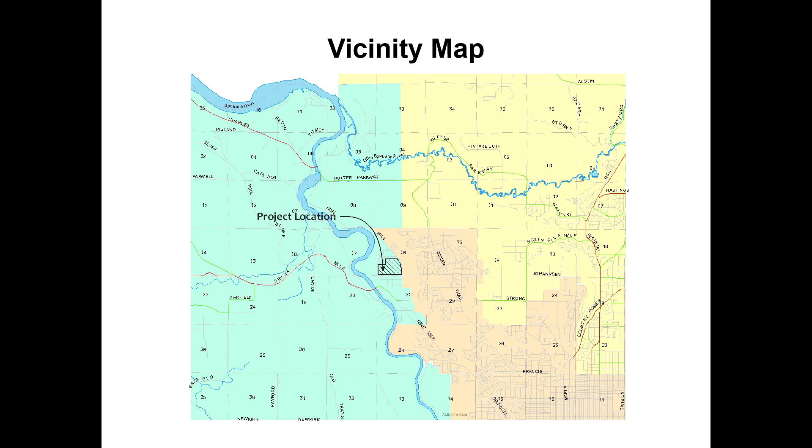On the north side, it is bounded by platted single-family lots that have been in place for many years. The south likewise is fully bounded by single-family homes. On the other side of the highway, the land is vacant. It's all owned by one family and has never had development on it. To the west, the property falls steeply away and is owned by the state.

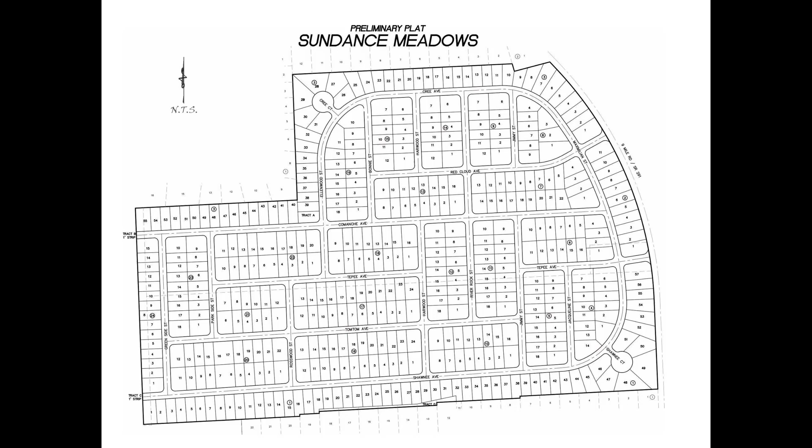At the present time, this is the layout of the preliminary plat. Now, some of you may have seen a previous plat layout that showed things such as townhouses, row houses, small lots, that kind of thing. That is no longer under consideration, and what is planned here is single-family homes available to all age groups.

There are two access points shown on the right side of the screen that are planned to Highway 291 or 9 Mile Road. The south one is called Tepee Avenue, and the north one is called Red Cloud Avenue. Those names are continuation of streets up on Indian Trail Road and were chosen in the customary manner of Spokane County. On the left side of your screen, you'll see two stub roads that go to the state property. At the present time, they don't tie into anything, but they do provide future access if any is needed.

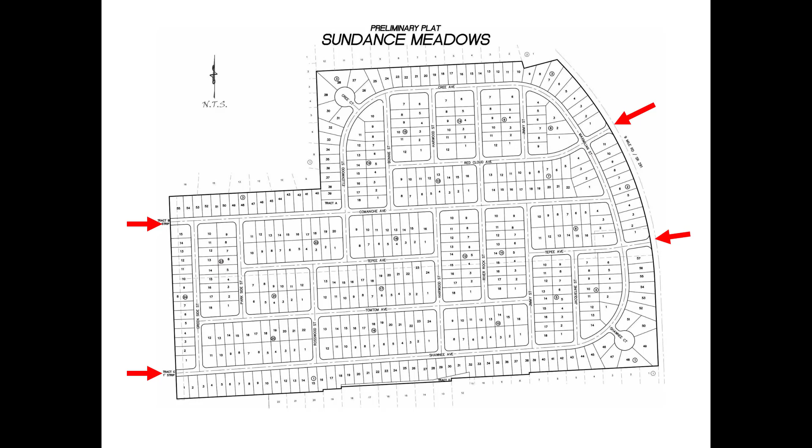On the south side of the plat, there is a small access road into the site that has been used previously for golf cart access to the golf course. At this time, it's not planned to extend that onto the site, and if it was extended, it would be used for pedestrian and bike access only. It's not wide enough for vehicular access.

I'm going to go through the schedule for a minute just so we have an idea of where we are in the project. This project did begin some time ago. In the summer of 2017, I prepared and submitted a trip generation and distribution letter. That document is fairly short, but it does describe how much traffic will be generated by the site and in general ways where the traffic will go.

In order to determine the distribution, or which direction the traffic is going to go, I actually counted which way the traffic went at Kindick and Highway 291. And I was surprised. It was 18% going to and from the north and 82% going to and from the south. That was consistent both AM and PM, both entering and exiting, and that's what was used in this study.

The next thing that happened was in the spring of 2018, when the amount of traffic that will be generated by this and the distribution of that traffic was brought forward to Spokane County as the approving agency of the preliminary plat, the City of Spokane, because they are a nearby agency and will receive a great deal of the traffic generated by this plat, and the DOT, who is providing direct infrastructure and from whom we need to get access permission. I'll go over the scope that we came up with them in just a minute here, after we go through the schedule.

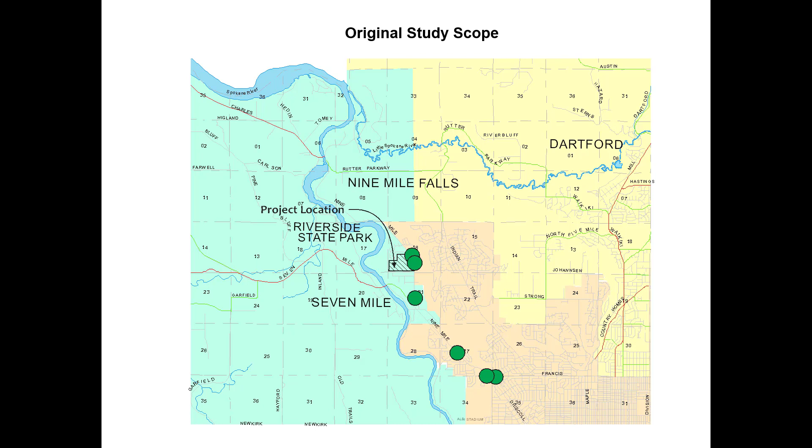The purpose of this meeting is twofold. The first is to share how the information received at the scoping meeting was used in the report and through the processing of the TIA. And secondly, to share the results of the traffic impact analysis that was conducted for this project.

Note that if you have public input, the hearing examiner will be happy to take that. That hearing will be at Spokane County, and the noticing will be very similar to what you received for this meeting. There will be a sign on the site with the date and time and place. There will be an ad in the newspaper with the same information, and if you live within 400 feet of the site, you will get a notice in the mail about that hearing.

Let's talk first about the input that was received at the scoping meeting and how that was handled. So one of the first things that people asked was, can we include the intersection of Highway 291 and Charles Road? And the answer to that was emphatically yes. We will absolutely include that. That is a location where the grade school traffic from this site, all the grade schoolers will use that intersection, as well as the other school-age children who are continuing through. It's also one of the first intersections that you come to north of the site, and as I mentioned before, 18% of the traffic will go that way.

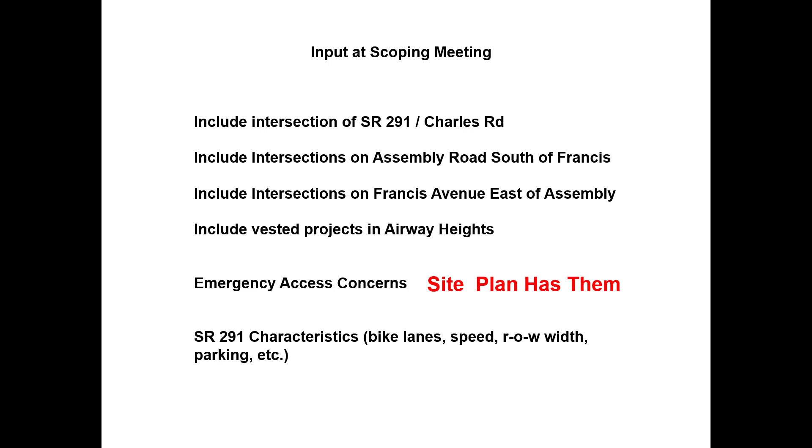They also wanted to talk about the Highway 291 various characteristics, bike lanes or lack thereof, the speed of the road, the right-of-way width, the parking, etc. And that's included later in the report.

There was even more input, including school bus issues. So will the school bus come and pick up children from here? The answer is yes. The school district will serve the site. There was also some concern about overcrowding at the schools and those kinds of things. And the school district will be notified about the hearing and has the ability to write proposed conditions to the hearing examiner for consideration.

They also wanted to know if STA, the Spokane Transit Authority, would extend a bus route here. Every time STA is approached about this, they make it very clear that they make their own decisions about routes, but the more population that there is in an area, the more likely it is that a bus route will get extended.

The next thing people were worried about was, is the sight distance acceptable at Kendick and at the two site entrances? So let's go into that in a little bit of detail. First of all, let's look at what our criteria is. It's a state highway. This is a table out of the state design manual, and as you see on the left, the design speed of the road, which it's posted at 50 miles an hour, but let's look at 55 just to make sure that we are accounting for the speed of the traffic. It says that the design stopping sight distance is 495 feet.

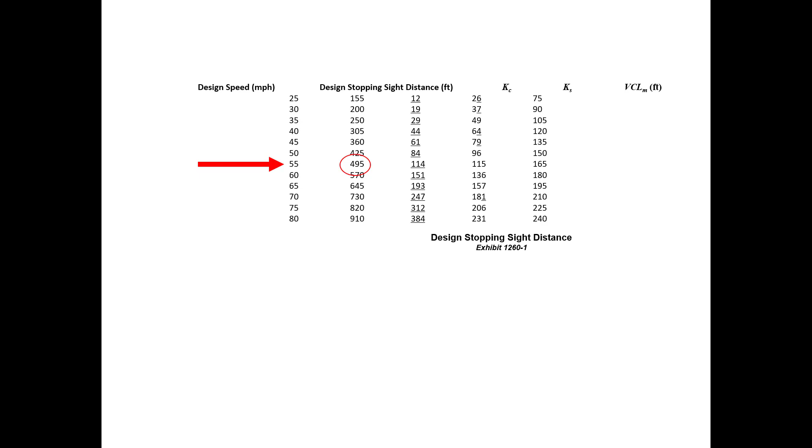The next thing people wanted to know is Barnes Road planned to extend from Indian Trail down to 9 Mile? That was a plan previously, but at this time the city has removed that plan and is not planning to do that. At the time it would have come into 7 Mile Road, and there's no saying that it might not get added to the plan in the future.

The next thing was about the 4-lane/5-lane highway. Would it be extended to the north? And the answer is no. It is not needed to extend north of 7 Mile Road.

Having completed our discussion on the input received at the traffic scoping meeting, we're going to go on to the second reason to have this meeting, and that's to discuss the findings of the traffic impact analysis conducted for Sundance Meadows. Let's talk about why we would do a traffic impact analysis. It's possible that intersections near this project would fall into unacceptable, what are called levels of service, as a result of the traffic that's generated by this project.

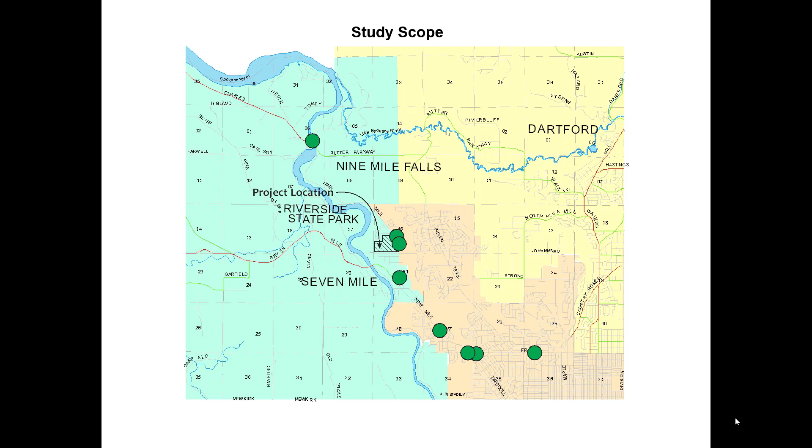In addition to the intersections mentioned previously, as a result of the scoping meeting, there were 2 more intersections added to the study. The first was at Charles and Highway 291. The other was at Francis and Alberta. In order to determine the impact to the transportation system that the additional traffic from Sundance Meadows will have, we have to sort that out from other factors that affect the transportation system.

So the first thing that we need to do is look at the existing system and see how it is functioning. I think those of you who ever drive up this way, especially in the afternoon, you know that if you're northbound on Assembly approaching Francis, that there's going to be a long line of cars and you're going to have to wait a long time. This waiting is called delay in traffic parlance, and if it gets to be too long, people will get impatient and there can start to be traffic crashes. And that's one of the things that we're trying to avoid by going through this analysis.

So the second thing is to look at what the future conditions are going to look like with various vested projects that already have rights to the capacity on the road from all known sources other than Sundance Meadows. And then thirdly and lastly, to look at what the future conditions are going to be with the additional traffic generated by Sundance Meadows.

In order to do this, we first of all collect the traffic volumes during the AM and PM peak hour. During the AM peak hour, we count traffic from 7 a.m. to 9 a.m. And the idea with choosing that time frame is that we're going to capture people who are on their way to work. Conversely, in the afternoon, we collect traffic volumes from 4 p.m. to 6 p.m. with the idea that we're going to capture traffic coming home from work.

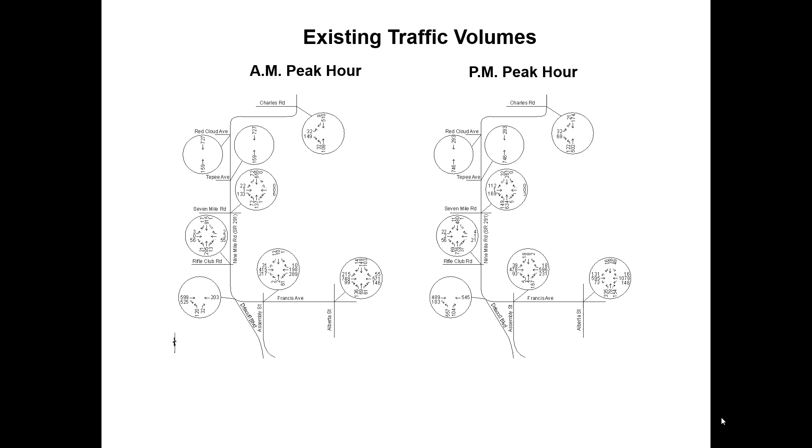So let's look at the traffic volumes that were collected in the field, which are shown here. Please feel free to pause this and look at them in more detail if you're interested. If you want to, they're also in the report, as previously mentioned. Feel free to look at them there.

So here is a summary of the level of service at the various intersections. The letter designation on the left is for the morning commute. On the right is the afternoon commute. We'll notice that Charles and 291 is level of service C and B, indicating that there is no problem with level of service there. We see at 7 Mile and 9 Mile that we're at level of service D in the morning and E in the afternoon, which means that we're approaching unacceptable levels, but at the current time it does meet standards. Rifle Club Road and 9 Mile Road is at level of service C during both the AM and PM peak hour.

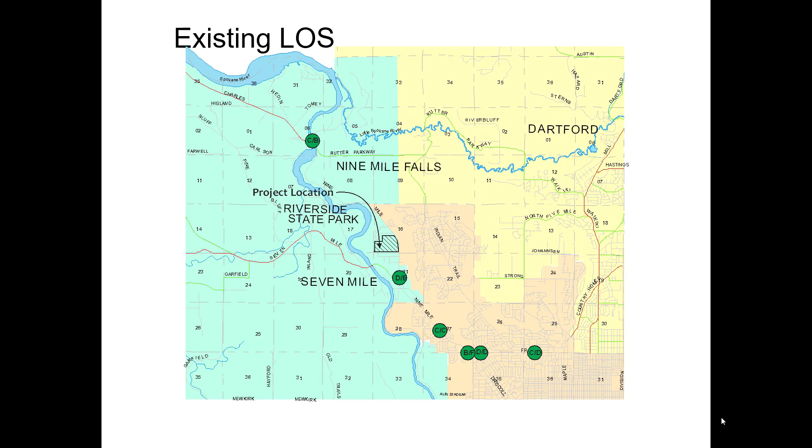As mentioned previously, at the northern end of Assembly, where Francis meets 9 Mile, the level of service is B in the morning and F, quite far into level of service F, during the afternoon peak hour. The intersection of Assembly and Francis, at the northern end of Driscoll Boulevard, is at level of service D, both AM and PM peak hours. Alberta and Francis, as the only signalized intersection, was shown to be functioning at level of service C in the morning and D in the afternoon. So again, our signalized intersection level of service C and D were okay. There's no mitigation required at this time at that intersection.

The unsignalized intersections, the level of service varies from B to F, and the intersection that's at F that requires mitigation is 9 Mile and Francis. It turns out that the transportation impact fee that the city of Spokane assesses to all projects in the northwest part of Spokane, they apply it to all different areas of Spokane, but the one that's for the northwest part of Spokane has as one of their projects a project listed to change the control of that intersection to a roundabout.

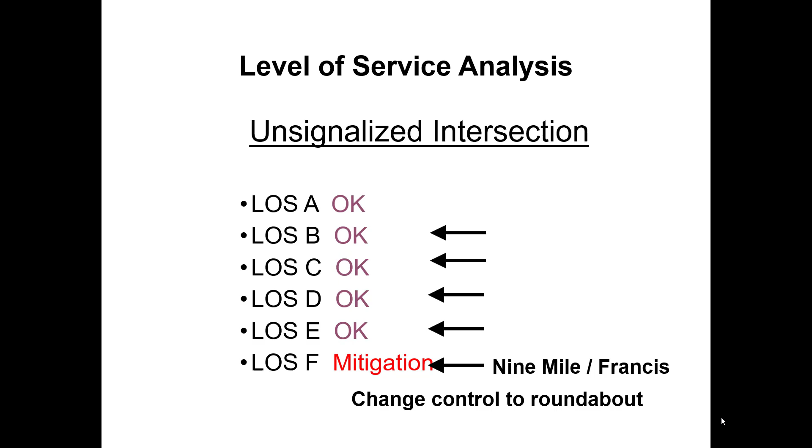This is the concept. This is one of two concepts that are currently being proposed by the city of Spokane. It's the one that I assumed, I have to make some assumptions for future issues, that I assumed would be chosen. Because it does, and notice that it incorporates both Assembly and Francis, and 9 Mile Road and Francis, bringing those intersections into one location.

When this becomes a roundabout, using the traffic volumes that we saw in the field today, the level of service would be A and B, well within acceptable levels, and a vast improvement over what we see today.

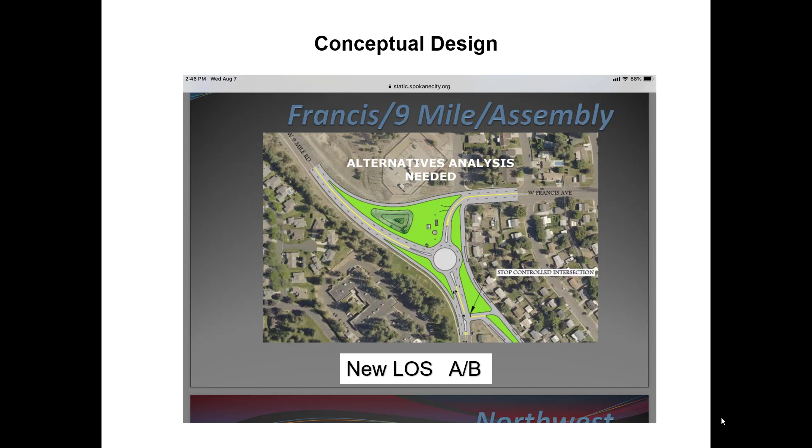So the next thing we need to look at is the future conditions without the traffic from Sundance Meadows. Again, what we're trying to do is sort out problems that exist without Sundance Meadows from problems that are made worse or that arise due to adding the traffic from Sundance Meadows.

One of the things that happened after the initial submittal of the traffic impact analysis and the revised analysis was that we needed to include projects on Indian Trail. And a lot of this was driven by the addition of Francis and Alberta. There are many projects, as you see here, that are located on Indian Trail, and they add hundreds of vehicles to the intersection of Francis and Alberta during the PM peak hour and the AM peak hour.

Of somewhat lesser concern are the Stevens County projects. They're just kind of lost in the shuffle there. That doesn't mean that they aren't important. And these directly will add traffic to all of 9 Mile Road, Suncrest Vistas, and Blackstone. In order to find out what projects still had lots outstanding in Stevens County, I called the county planning department, and there's about 64 lots that are outstanding. There's nothing else that's approved out that way. So we seem to be on the tail end of development out in the Suncrest area.

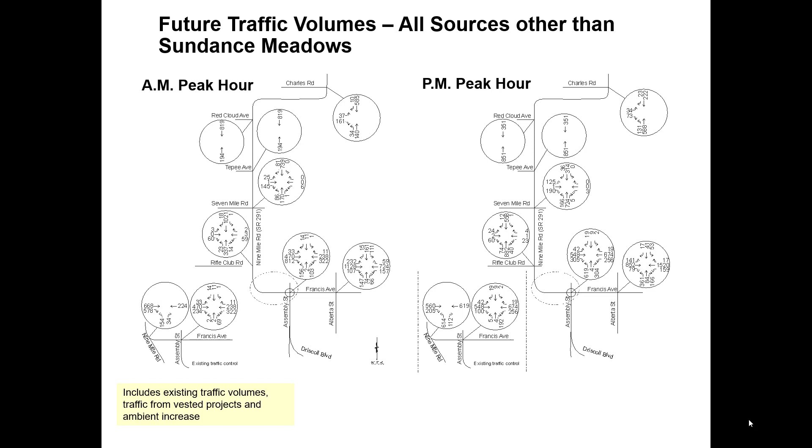This graphic shows the addition of the traffic expected from the various vested projects shown on the previous slide, added to the existing volumes, and then a growth factor, which for this study was scoped at 1.5% annually, which over the 5-year life of a traffic impact analysis is 7.7%. Again, feel free to stop and look at these volumes if you're interested. Otherwise, look at the report.

So we find that there are some things that change. And the level of service, for example, at 7 Mile and 9 Mile falls to level of service F, both during the AM and the PM peak hour. Some intersections aren't really affected, like Charles and Highway 291, that remains at C and B. The intersection of Rifle Club Road and 9 Mile changes from C during both AM and PM peak hours to level of service C during the AM peak hour and D in the PM peak hour.

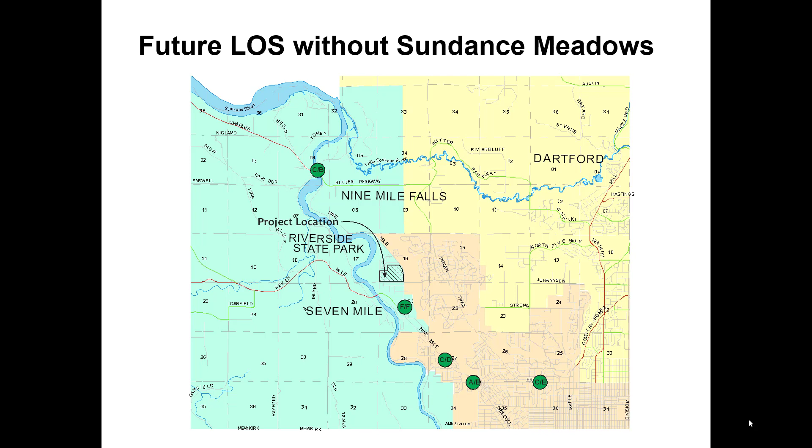The new roundabout serving Francis and 9 Mile and Assembly and Driscoll continues to work at very good levels of service, A and B. Here's where we come into a little bit of an issue with Alberta and Francis, which is level of service C in the morning and E in the afternoon. It turns out that level of service E, as mentioned previously, does require mitigation.

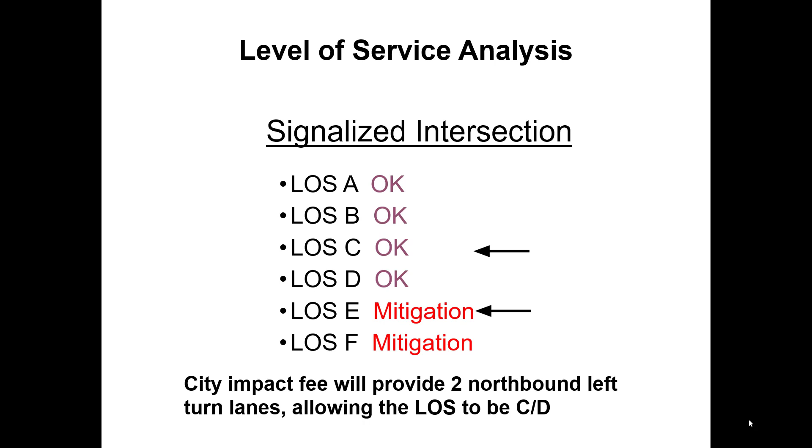Again, as we saw with the roundabout installation at Francis and 9 Mile, the city impact fee also will address this intersection. And the mitigation that's planned is to provide 2 northbound left turn lanes on Alberta at Francis. And this will allow the afternoon level of service to improve from E to D and to be within acceptable levels.

For the unsignalized intersections, now that there's a roundabout at Francis and 9 Mile, that's working at level of service A and B. We've got some other intersections that are at C and D, but that 9 Mile and 7 Mile intersection has fallen to F. There was some real surprise that this intersection cropped up as having issues at all. It turns out that the county has paved part of the road that links 7 Mile to Airway Heights, as some of you know. And that has proven to be a really popular route to get to the West Plains area. This was a surprise to the DOT.

They had no idea that this intersection was going to have level of service problems, and they have a lot of issues on their plate right now, especially in the Eastern District, and there is no public money available to address this situation. So as things stand right now, this intersection will be functioning below acceptable levels whether Sundance Meadows is approved or not.

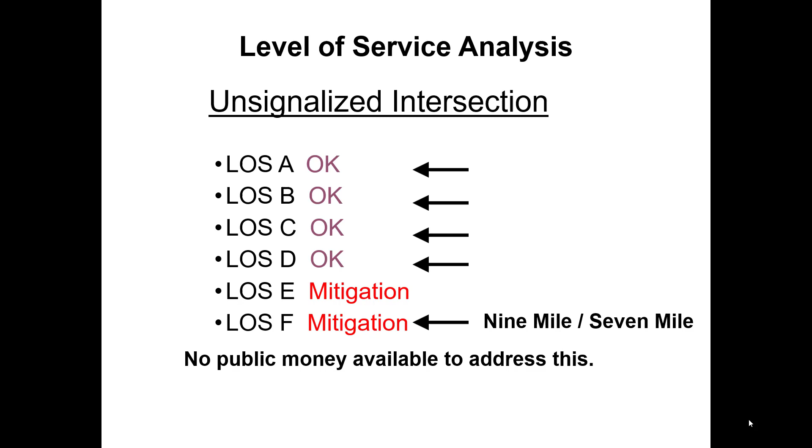The DOT is taking the mindset that since this is operating below acceptable levels of service and there is no money set aside to address it at this time, if Sundance Meadows does not assist in addressing this situation, the DOT has no choice but to say that there is inadequate public facilities for the project. We'll discuss that in more detail later on.

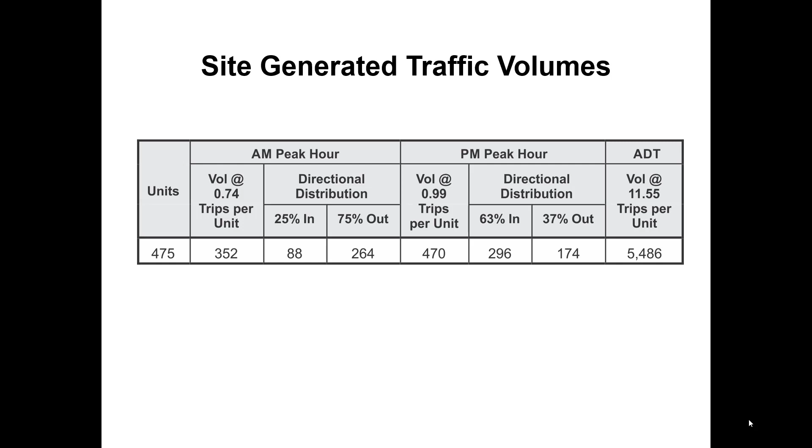So let's talk about Sundance Meadows for a minute. 475 single-family homes will generate 352 trips during the AM peak hour and 470 trips during the PM peak hour. It's a lot of traffic, and that's why we had to do the traffic impact analysis at all. Now, we talked about the directional distribution of traffic, and as mentioned previously, from the site, we expect 18% to go north and 82% to go south.

There is quite a demand currently to use 7 Mile Road. We anticipate that the new people who will locate at Sundance Meadows will have similar commuting characteristics as the existing traffic on Highway 291. So we expect 21% of the traffic to peel off on 7 Mile Road and access the West Plains or wherever else it is that they're going, and 61% to continue into the city of Spokane. At the new roundabout, or whatever the control might be, we expect that 25% will use Assembly and 36% will travel on to Francis.

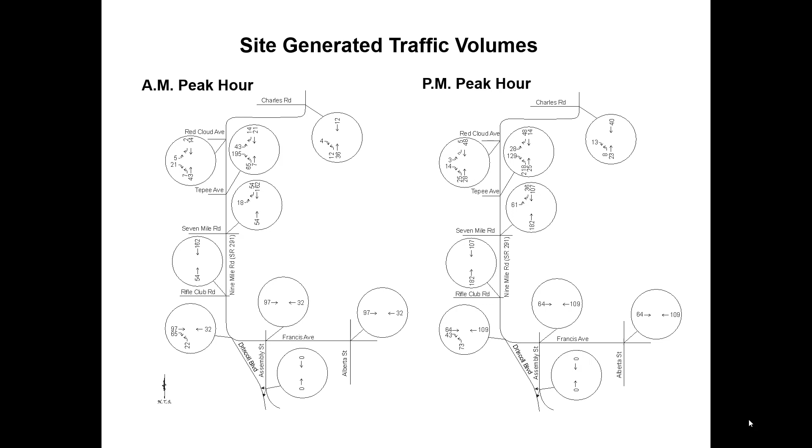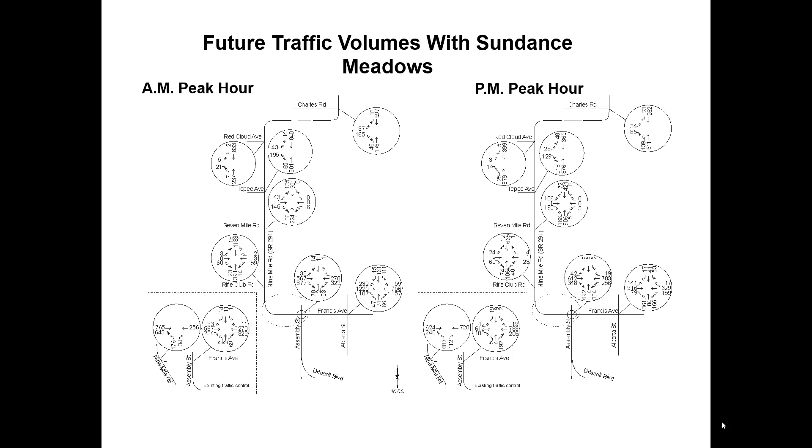Using those characteristics, the traffic volumes generated by the Sundance Meadows project itself are shown on this graphic. Note in the lower left corner under each peak hour, there's a dashed box that shows some traffic volumes of the Francis and Assembly intersection separated from the 9 Mile and Francis intersection. In some ways that was put in so that the way that those traffic volumes were combined together into one intersection would be clear, and also if the city chose to reconfigure that intersection in such a way that there were still two separate intersections, they would have projected traffic volumes for that scenario.

So in the future, with those traffic volumes and the improvements as previously described, we see that Charles and 291 remains at level of service C and B. The new stop-controlled intersections will function, Red Cloud at level of service C and B, and Tepee Avenue at level of service D and C. With a roundabout, the intersection of 7 Mile and 9 Mile will operate at level of service A during both peak hours.

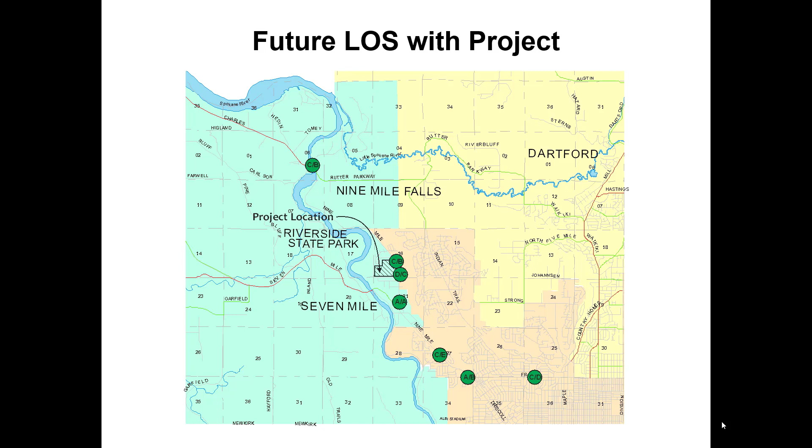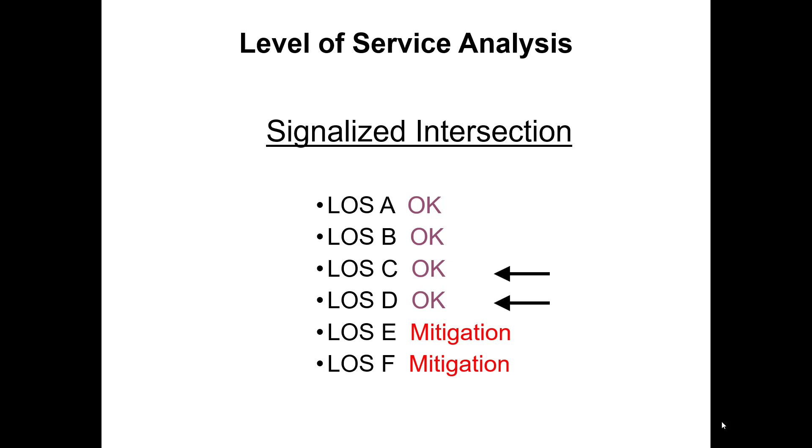Rifle Club Road and 9 Mile will operate at level of service C and C, both acceptable levels of service as an unsignalized intersection. The new roundabout at Francis and 9 Mile will continue to operate at level of service A and B. Alberta and Francis will continue to function at level of service C and D. So we see that the unsignalized intersections are all functioning at acceptable levels of service, and the signalized intersection likewise acceptable levels of service. So the intersections that are requiring mitigation due solely to the traffic generated by Sundance Meadows are none.

But there is mitigation that will be required. So this includes frontage improvements, which includes a separated pedestrian/bike pathway, and there is a possibility in the future, if development was to happen across the street from Sundance Meadows, that a roundabout might be needed at Highway 291 and Tepee. So we have to make sure that there's enough right-of-way so that that roundabout could be installed in the future by other people.

There also needs to be a southbound right turn pocket on SR 291 at Tepee Avenue. Again, we had to go through a supplemental analysis of that specific issue, and that's included in the traffic impact analysis. We do need to pay the proportional transportation mitigation fee to the city of Spokane. Clearly, we are benefiting by that fee through the installation of a roundabout at Assembly, Francis, 9 Mile, Driscoll and the construction of the 2 northbound left turn lanes on Alberta and Francis. Paying this fee helps make those projects happen.

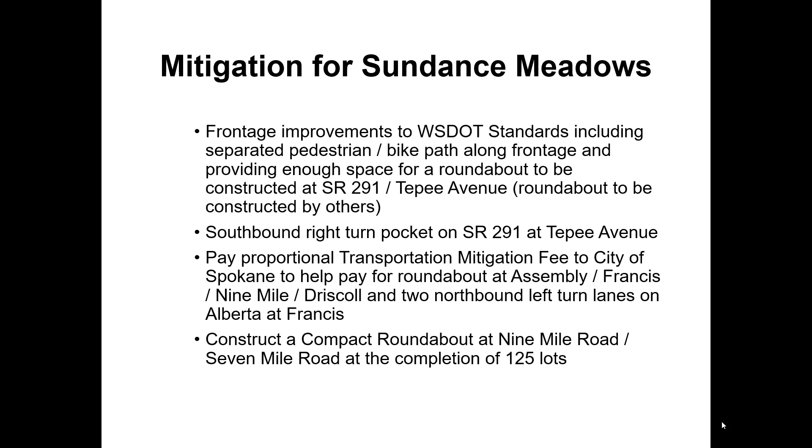The next thing that is a mitigation measure for Sundance Meadows is the construction of a compact roundabout at 9 Mile Road and 7 Mile Road. As mentioned previously, it goes to a level of service F, not necessarily because of the traffic from the project, but nevertheless, it does go to level of service F. Something needs to be done, but we are recommending that that be done at the completion of 125 lots. We want to make sure that that compact roundabout can happen, and allowing the developer to put some money aside for that enables that mitigation measure to be put in place.